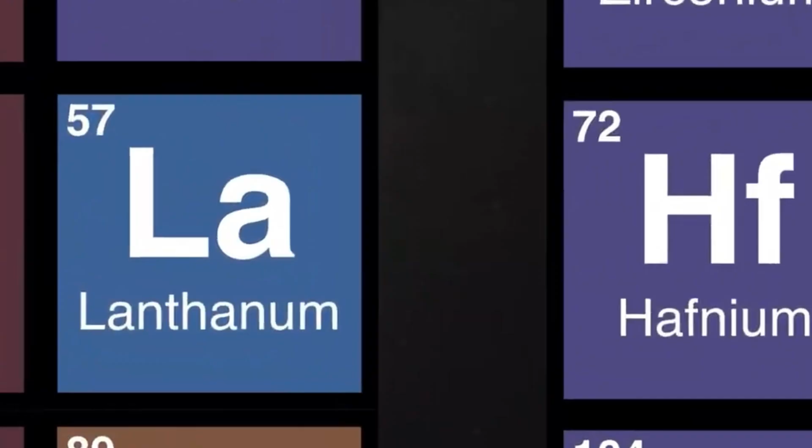What are rare earth elements? Rare earth elements, commonly abbreviated as REEs, comprise 17 metallic elements. 15 belong to the lanthanide series on the periodic table. Two additional elements, scandium and yttrium, are grouped with them because they share similar chemical behaviors and are typically found in the same mineral deposits.

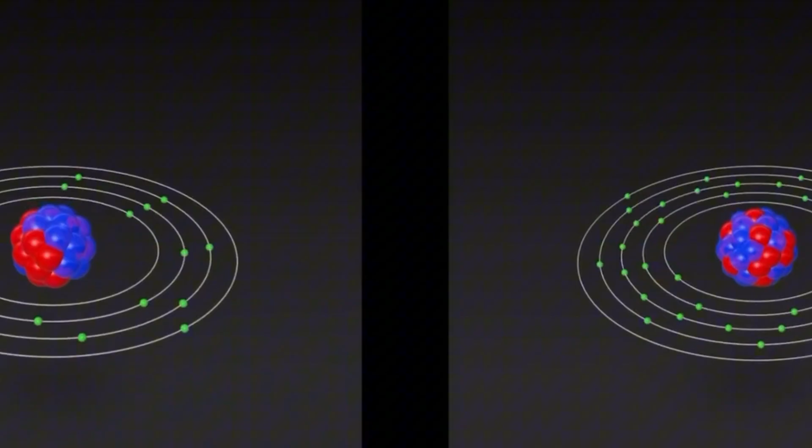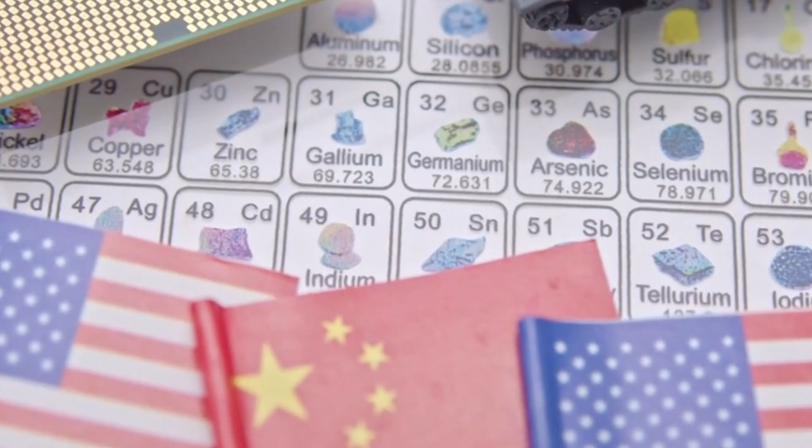The name is, in a sense, misleading. Cerium, one of the most widely used REEs in industry, is more abundant in the Earth's crust than copper. Even thulium, the least common of the group, is more plentiful than gold. They are called rare not because of scarcity, but because of distribution. These elements are almost never found in economically viable concentrations. They are dispersed in minute quantities across broad geological formations, making extraction and refinement technically demanding and commercially expensive.

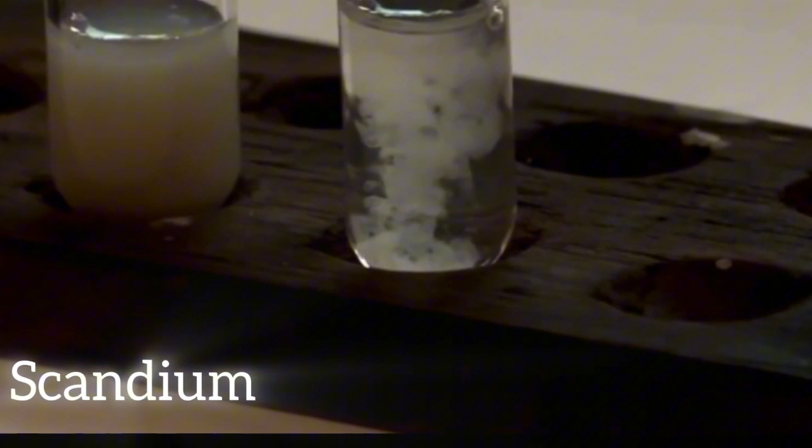An analogy: imagine dissolving a teaspoon of salt into an Olympic swimming pool. The salt is present. Recovering it in pure form is another matter entirely.

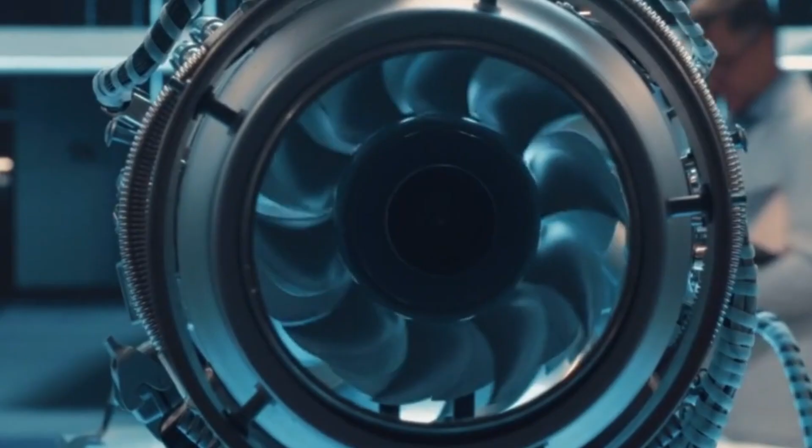What makes REEs industrially irreplaceable is their combination of magnetic, thermal, optical, and catalytic properties that no substitutes can fully replicate. In materials science, they are sometimes called the vitamins of industry, needed in small quantities, yet essential to function. In aviation specifically, their role is pervasive, from the turbine at the core of the engine to the electrical systems running throughout the airframe.

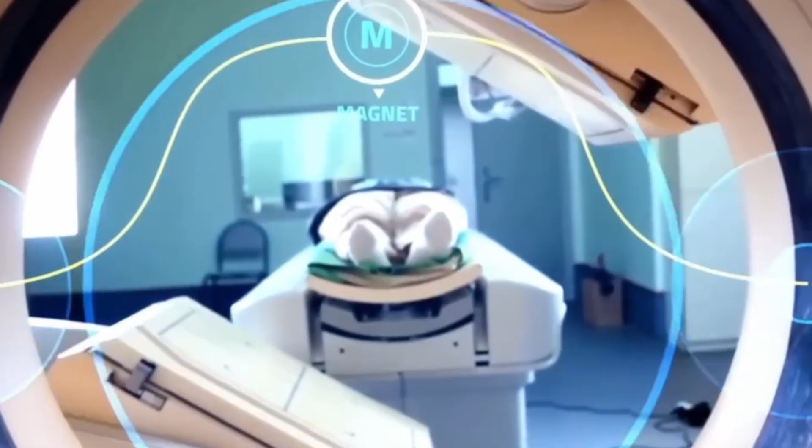The jet engine, operating beyond its own limits. To appreciate why rare earths are so critical, one must first understand the operating environment of a modern turbofan engine. Engines such as those powering the Boeing 787 Dreamliner or the Airbus A350 operate on a straightforward thermodynamic principle: draw in air, compress it, combust it with fuel, and extract energy from the resulting gas flow as it expands through a series of turbine stages.

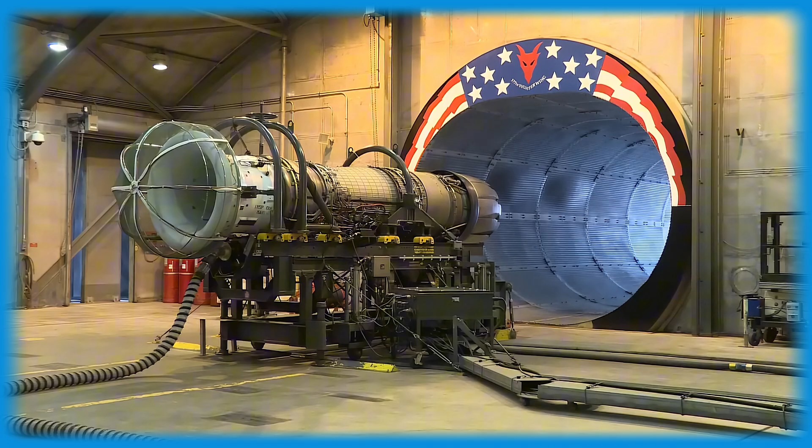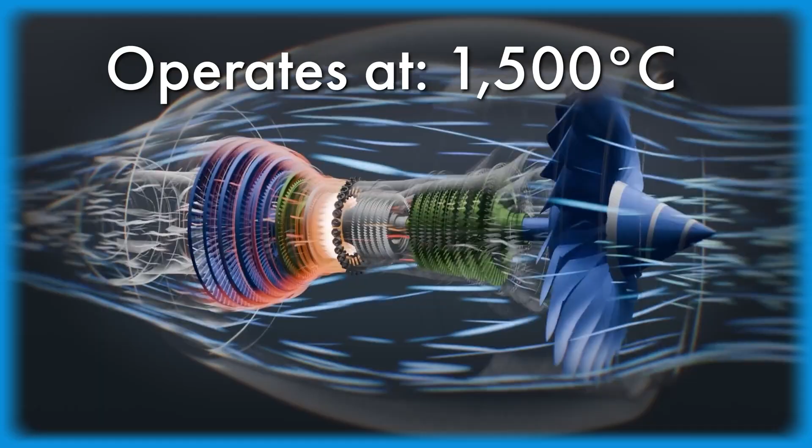The turbine blades at the heart of this process sit directly in the path of combustion gases reaching between 1,500 and 1,700 degrees Celsius. Here is the problem: the nickel-based superalloys from which those blades are forged have a melting point of approximately 1,300 degrees Celsius. The engine, in other words, runs hotter than the melting point of its own components. This is not a design flaw. It is an engineering challenge that rare earth elements and the materials they enable have been specifically developed to solve.

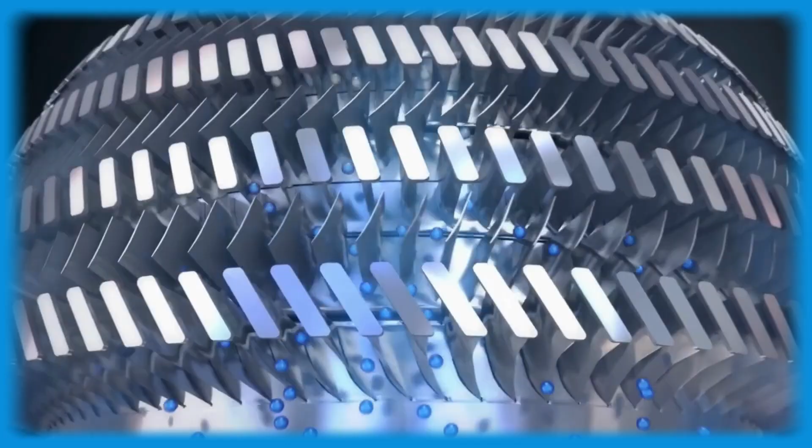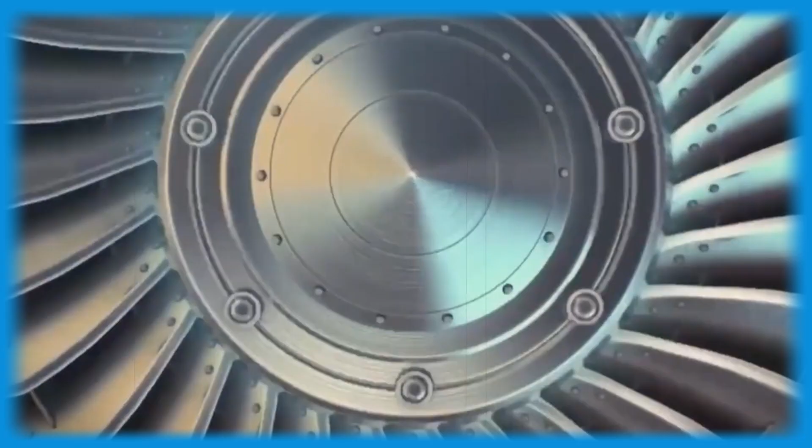Yttrium, the thermal barrier. Yttrium, element 39, is arguably the most consequential rare earth element in jet aviation. Turbine blades in modern engines are coated with a ceramic layer called a thermal barrier coating, or TBC. The most widely used formulation is yttria-stabilized zirconia, YSZ, a compound in which yttrium oxide is added to zirconium oxide. Zirconia on its own is an excellent thermal insulator but is structurally unstable at elevated temperatures. It undergoes phase transformations, expands unevenly, and fractures under thermal cycling.

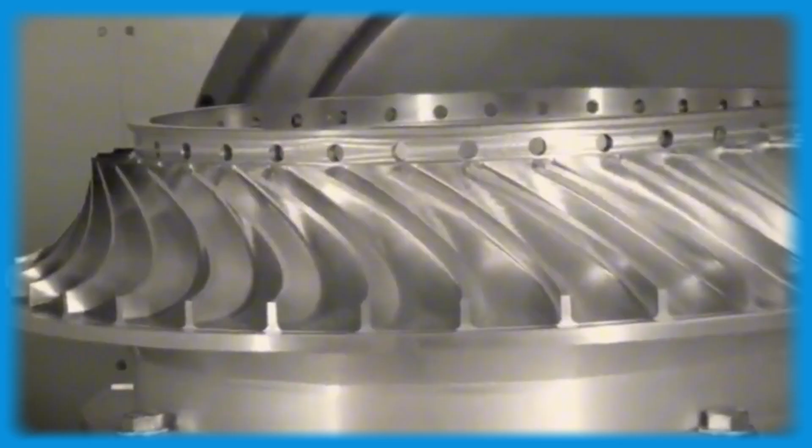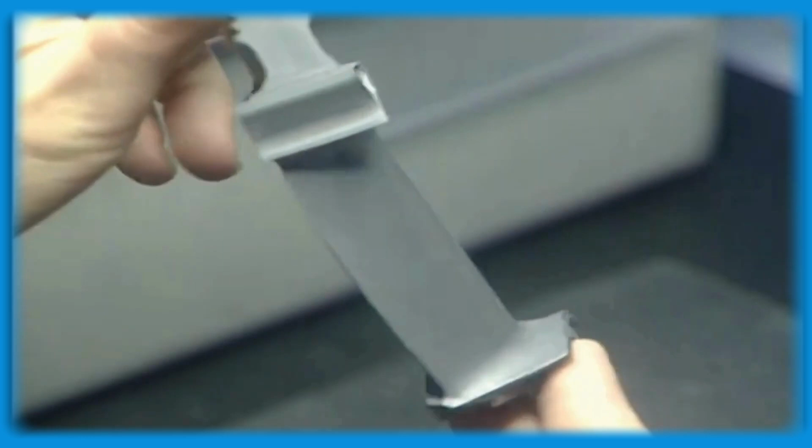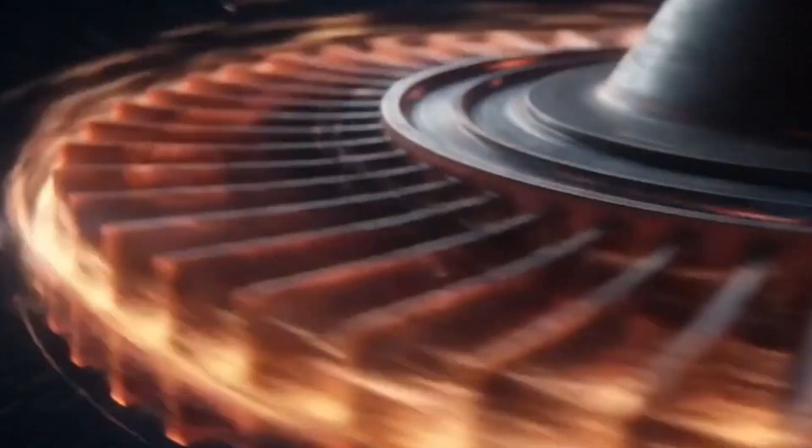Yttrium arrests this instability by locking the zirconia into a tetragonal crystal phase, preventing the destructive phase changes that would otherwise occur. The result is a ceramic coating typically between 100 and 300 micrometers thick that insulates the underlying metal blade, reducing its surface temperature by as much as 150 to 200 degrees Celsius relative to the gas stream. This margin is what makes modern high-efficiency engines thermodynamically possible.

An advancement worth noting: recent research has focused on next-generation TBC formulations using rare earth zirconate and hafnate compounds, materials capable of operating beyond the practical temperature ceiling of conventional YSZ. These emerging coatings promise a further improvement in thermal efficiency, directly translating to reduced fuel consumption and lower emissions across the global fleet.

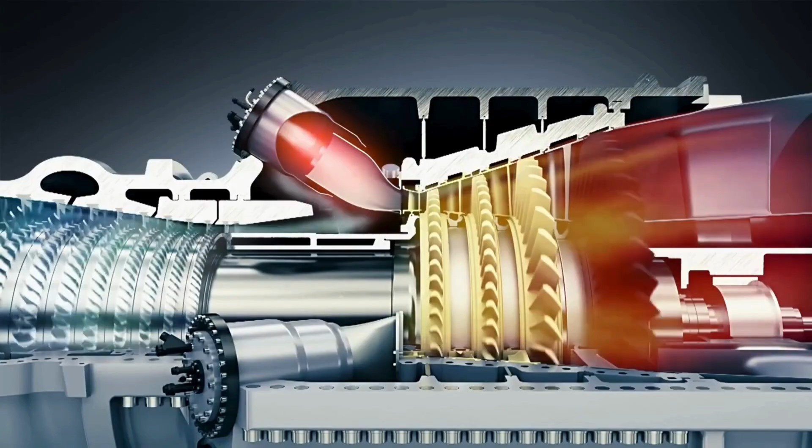Without yttrium-based thermal barrier coatings, engine operating temperatures would be substantially lower, fuel efficiency would decline, and routes such as Singapore to New York, currently among the longest non-stop commercial flights in the world, would require an intermediate stop. Neodymium and dysprosium, the magnet revolution.

Aviation's ongoing shift toward what engineers call the more electric aircraft architecture, replacing hydraulic and pneumatic systems with electrical equivalents, has made permanent magnets a central component of modern airframes.

The dominant technology is the neodymium iron boron magnet, developed in 1982. NdFeB magnets are the most powerful class of permanent magnet yet produced, generating magnetic fields far stronger than their predecessors, at a fraction of the size and weight.

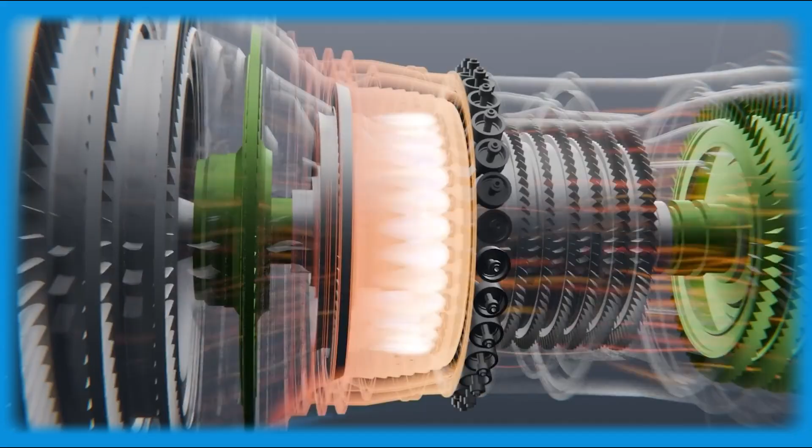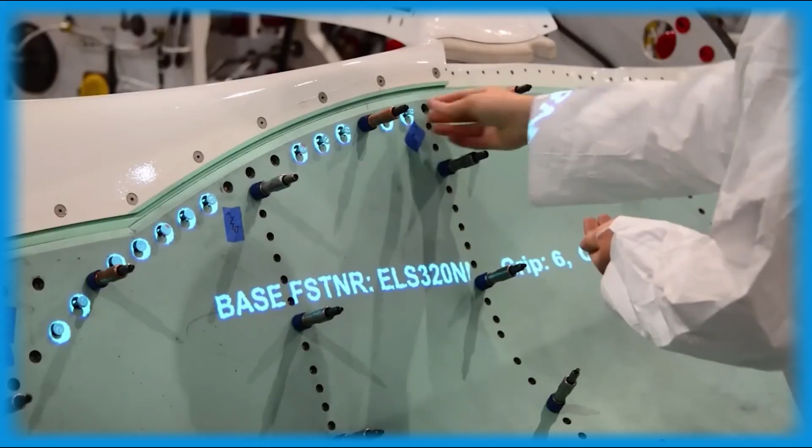In a modern commercial aircraft, these magnets are found in electric actuators controlling flight surfaces, onboard electrical generators, fuel and hydraulic pumps, environmental control systems, avionics, cooling, and landing gear mechanisms.

The Boeing 787 generates 1.45 megawatts of onboard electrical power, the highest of any commercial aircraft at its time of introduction. That generating capacity is underpinned by neodymium magnet technology.

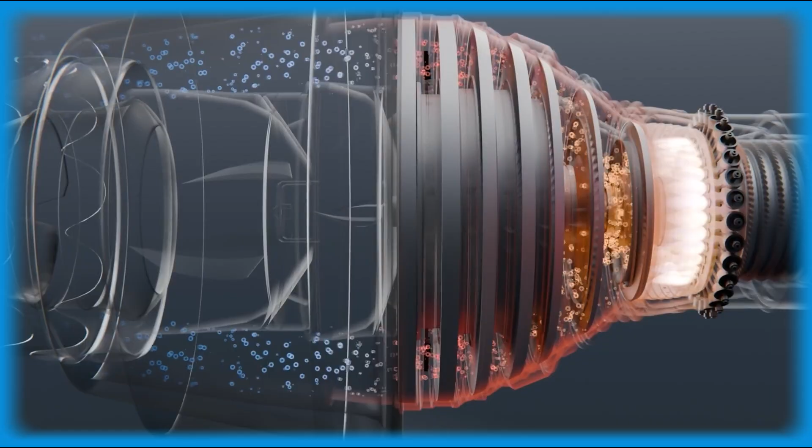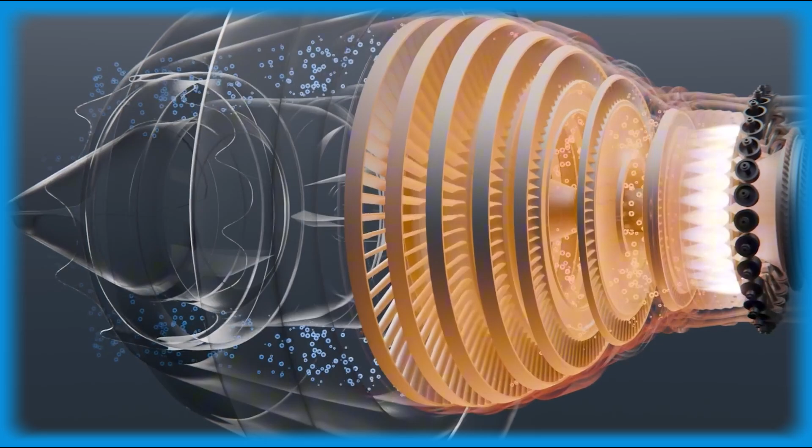However, neodymium magnets have a significant operational vulnerability: they lose magnetic strength as temperature rises. This phenomenon, known as coercivity reduction, is a serious concern in aircraft, where temperatures can range from -60 degrees Celsius at altitude to well above 150 degrees Celsius near engine nacelles and avionics bays.

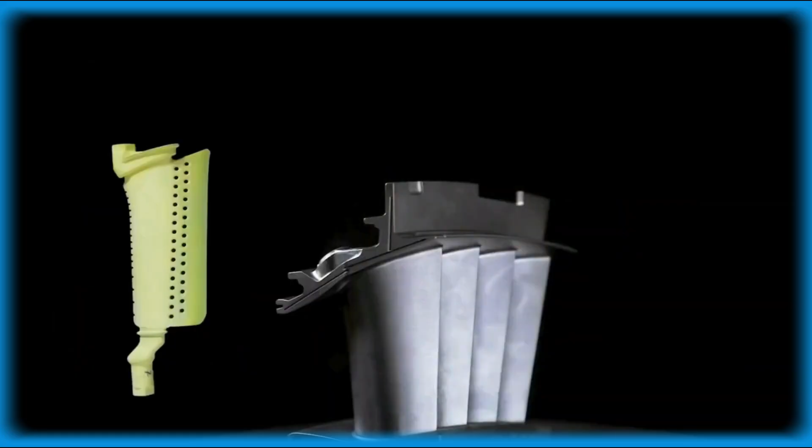Dysprosium, element 66, addresses this directly. When added to neodymium magnets in concentrations of 2 to 6%, dysprosium significantly raises the coercivity of the magnet, maintaining field strength across the wide temperature range experienced in service.

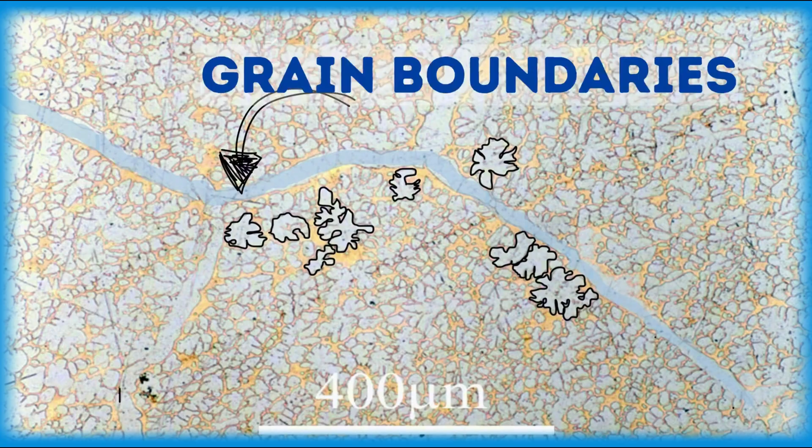A critical supply dimension: dysprosium is among the scarcest of the commercially significant rare earth elements, produced almost exclusively as a byproduct of other mining operations. Its supply is structurally constrained, and demand is growing as electrification of aviation and transportation broadly accelerates.

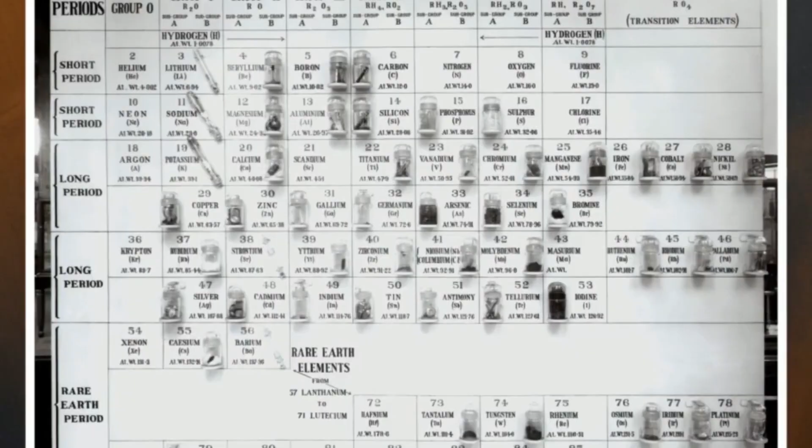This has focused considerable research effort on dysprosium-lean and dysprosium-free magnet formulations, though no commercial alternative has yet matched the performance of the established alloy at operating temperatures.

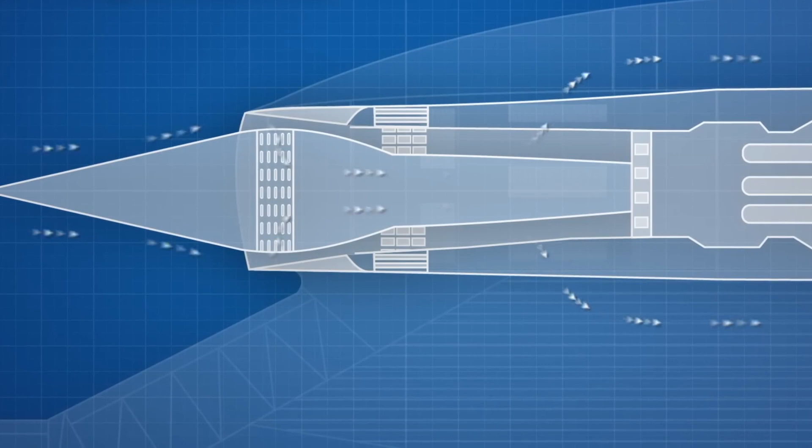Lanthanum and cerium, strengthening the alloys. Beyond coatings and magnets, rare earth elements are incorporated directly into the metallic alloys that form the structural foundation of jet engines and airframes. Lanthanum, the first element of the lanthanide series, is added to nickel-based superalloys in trace concentrations during manufacture. Its effect operates at the microstructural level.

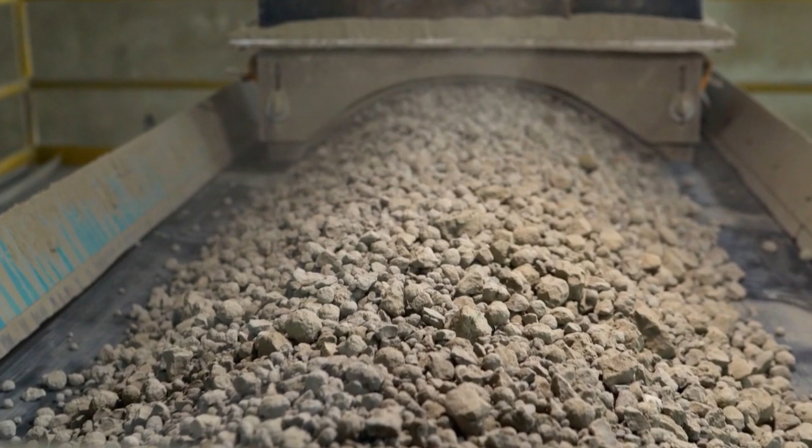Lanthanum refines the grain size of the metal as it solidifies, producing a finer, more uniform internal architecture. Finer grain structures improve tensile strength, fatigue resistance, and crack propagation behavior, all of which translate directly to extended component service life and longer maintenance intervals.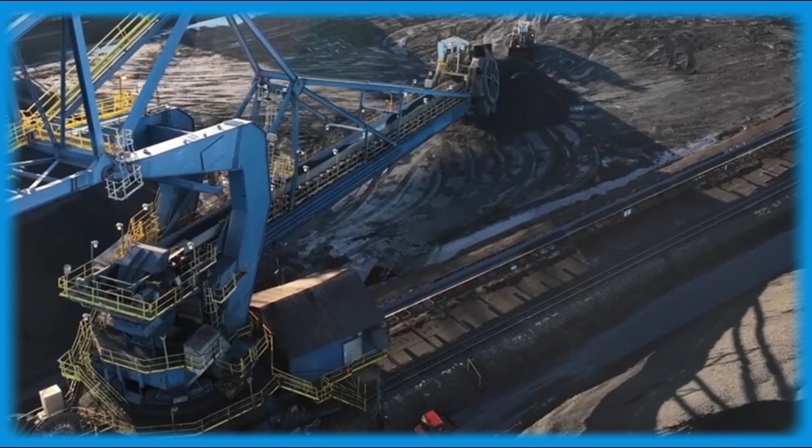Cerium serves a complementary function in aluminium alloys, which are used extensively throughout airframe structures. At elevated temperatures, conventional aluminium alloys are susceptible to microstructural coarsening, a process by which the internal phases of the metal consolidate and degrade mechanical properties.

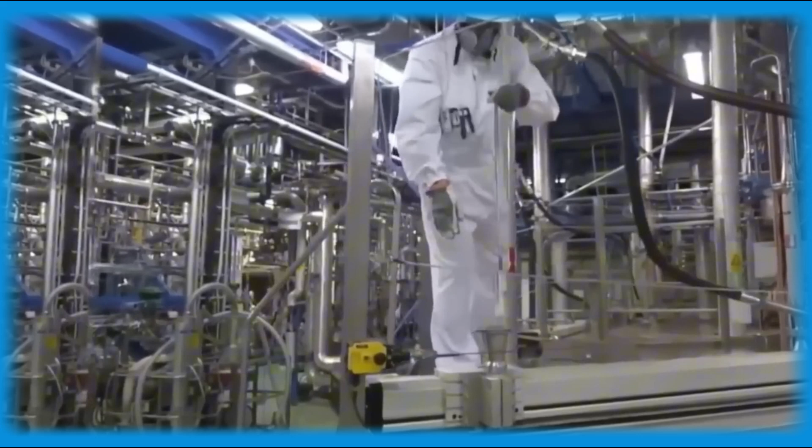Cerium additions form thermally stable intermetallic phases that resist this coarsening, preserving strength and oxidation resistance through repeated thermal cycles.

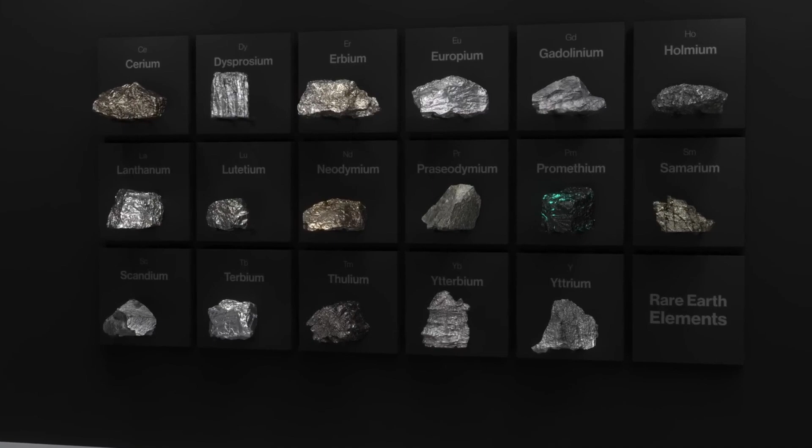An emerging application: researchers at several national laboratories and aerospace manufacturers have recently demonstrated cerium-modified aluminium alloys capable of retaining their mechanical properties at temperatures significantly above the operational limit of standard aerospace aluminium. If this technology matures to production readiness, it could enable structural weight reductions across large airframe sections, with meaningful implications for fuel efficiency and emissions.

In an industry where a single kilogram of excess weight costs an airline thousands of dollars in fuel annually across its fleet, the compounded value of rare earth enhanced materials is measured in the billions.

The broader ecosystem in aviation: several additional rare earth elements contribute to aviation in more specialized roles.

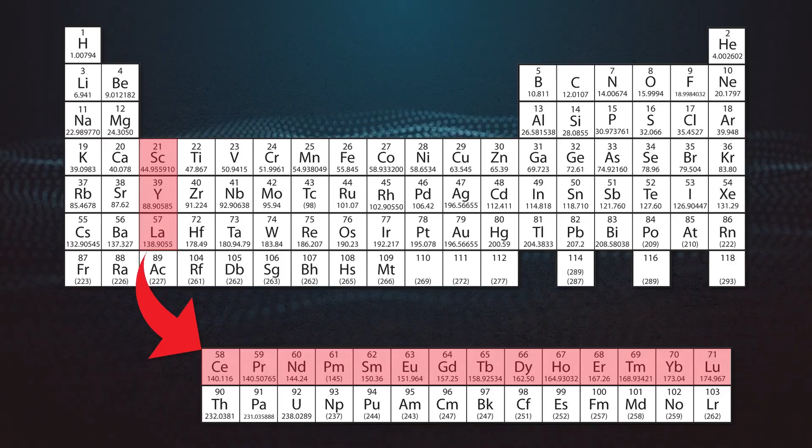Praseodymium, element 59, is combined with neodymium in magnet formulations to balance cost and performance. It also imparts specific optical properties to glass coatings used in cockpit windows, where spectral filtering and glare reduction are operationally significant.

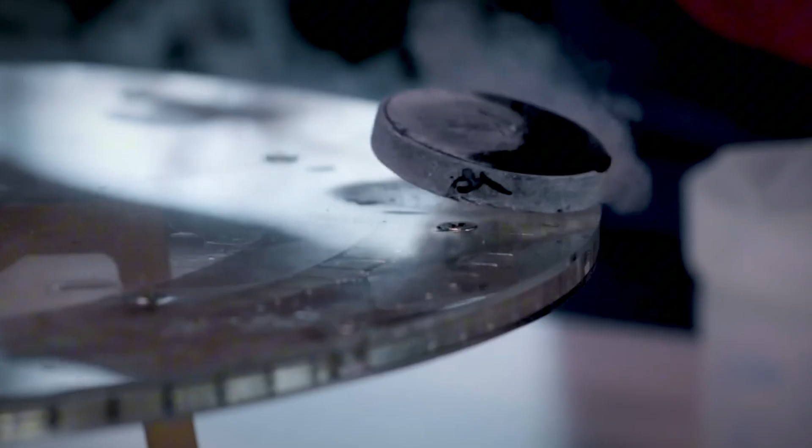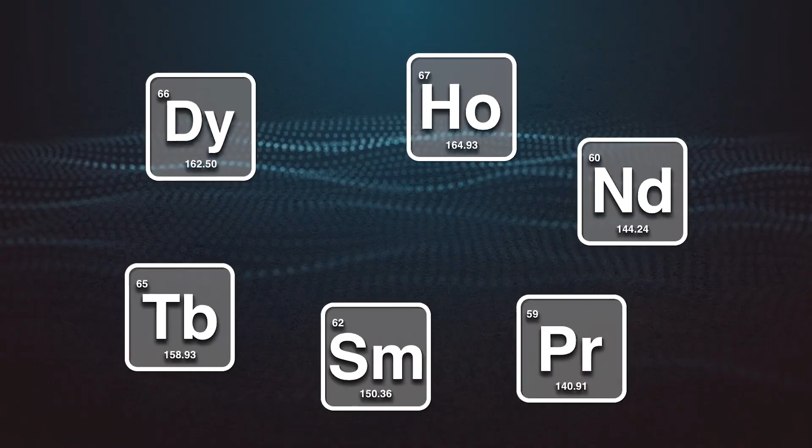Samarium, element 62, forms samarium cobalt magnets, the predecessor technology to NdFeB. While delivering lower magnetic energy density overall, samarium cobalt magnets exhibit superior thermal stability, making them the preferred choice for sensors and actuators mounted in close proximity to engine hot sections where temperatures exceed the operating range of neodymium-based designs.

Terbium, element 65, is used in magnetostrictive materials, substances that undergo controlled dimensional changes in response to a magnetic field. In precision actuators and vibration damping systems, this property enables active structural control, reducing fatigue loading on critical components.

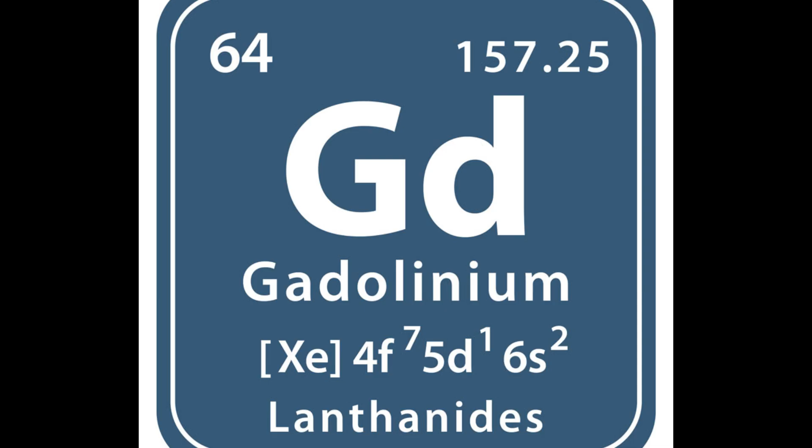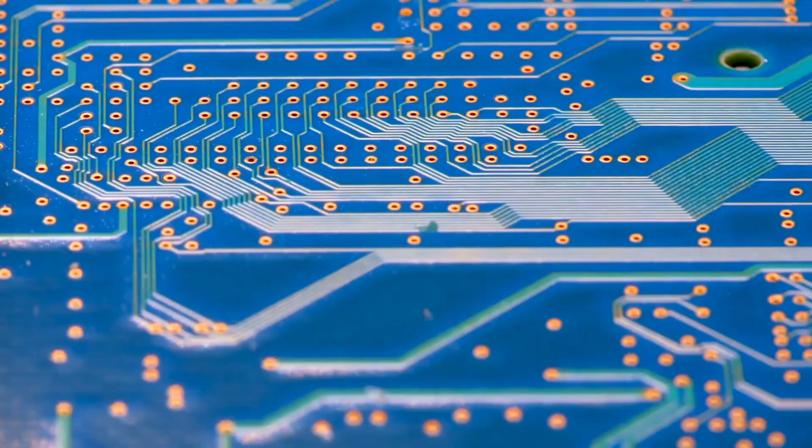Gadolinium, element 64, with its exceptional neutron absorption cross-section, is under active investigation for use in radiation shielding composites relevant to high-altitude flight, where galactic cosmic radiation exposure is a recognized occupational health consideration for flight crew.

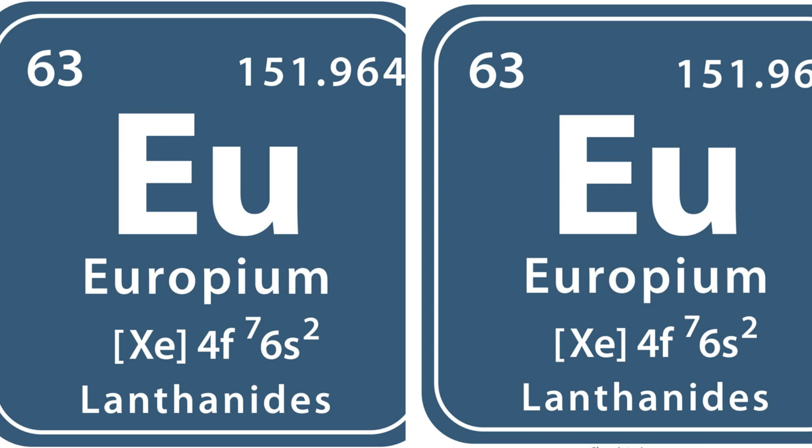Europium and ytterbium contribute to the phosphorescent and display coatings used in instrument panels and cabin systems, where their precise luminescent properties underpin readability and reliability across a wide range of ambient light conditions.

The geopolitical dimension.

The dependency of global aviation on rare earth elements raises a strategic question that extends well beyond procurement management. According to the International Energy Agency, China accounts for approximately 60% of global rare earth mining output and controls more than 85% of global processing and refined magnet manufacturing capacity. The concentration of this capacity in a single nation represents a structural vulnerability across the entire aerospace sector, civil and military alike.

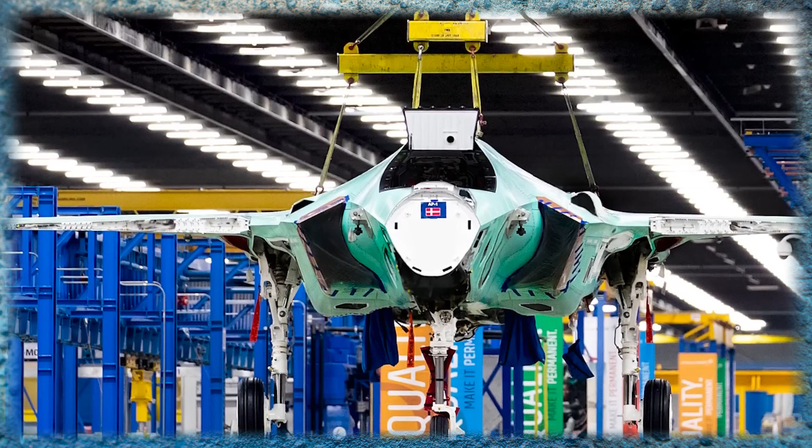The consequences of this dependency have moved from theoretical to operational. In September 2022, the United States Department of Defense was compelled to suspend deliveries of the F-35 Lightning II fighter aircraft after the discovery that an alloy used in a component of its engine contained a combination of cobalt and samarium originating from Chinese-controlled supply chains, in violation of domestic defense procurement regulations. Each F-35 airframe contains approximately 417 kilograms of rare earth materials distributed across its propulsion, avionics, targeting, and electronic warfare systems. The incident was not an anomaly.

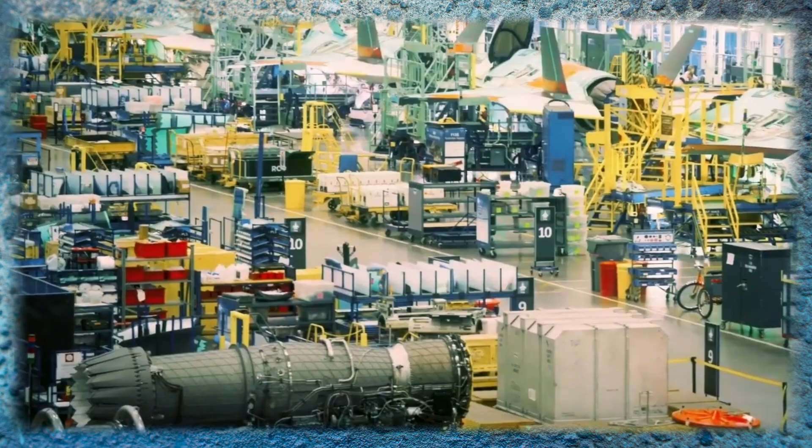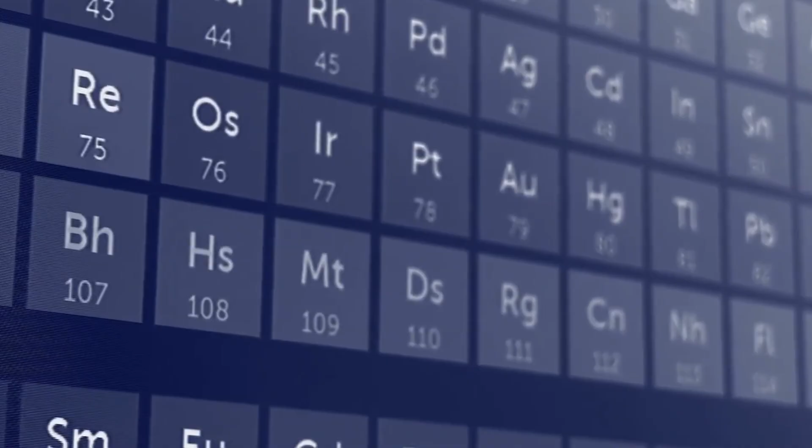It was a signal. Commercial aerospace faces the same exposure. Every major engine manufacturer, GE Aviation, Rolls-Royce, Safran, and Pratt & Whitney, sources rare earth inputs through supply chains that route, at some stage, through Chinese processing facilities. In a scenario of significant export restriction, production timelines and maintenance supply chains for commercial aircraft would be materially disrupted.

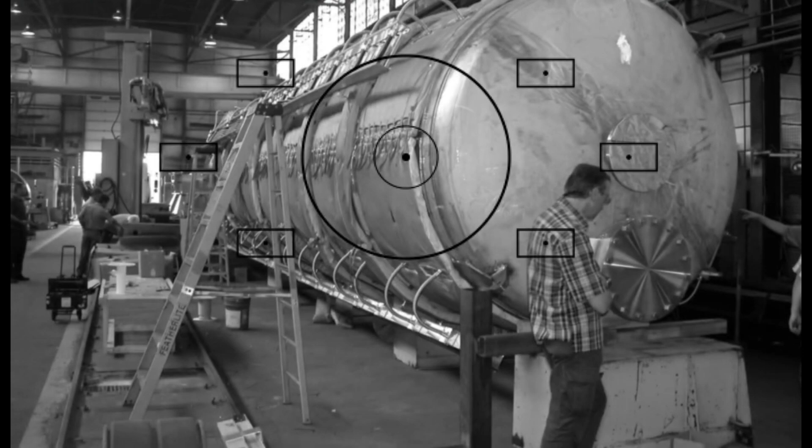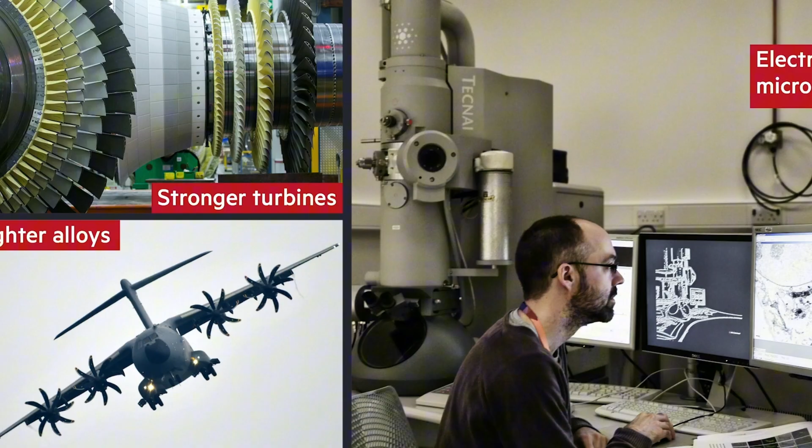China has demonstrated its willingness to use rare earth access as a lever in trade disputes. In 2010, it imposed export restrictions that sent global rare earth prices to multiples of their prior levels. Whether a more comprehensive restriction would be deployed in a future geopolitical context is an open question, but the structural dependency makes the answer consequential.

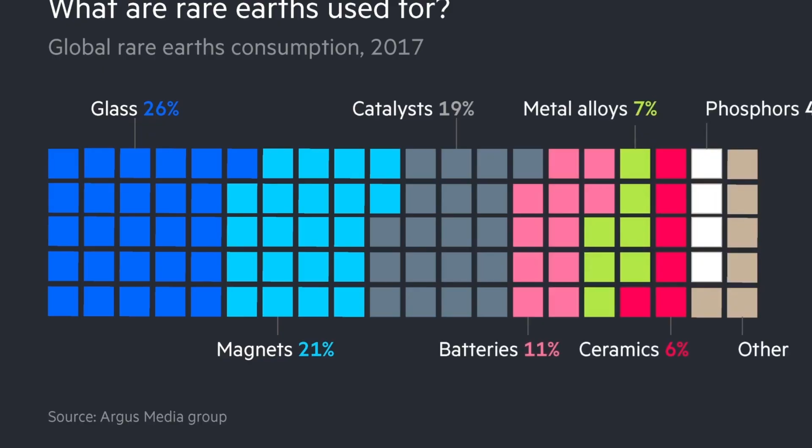Strategic responses and the path forward. The aerospace industry and the governments that underwrite it have not been passive in the face of this risk. Supply diversification has become a policy priority across multiple jurisdictions.

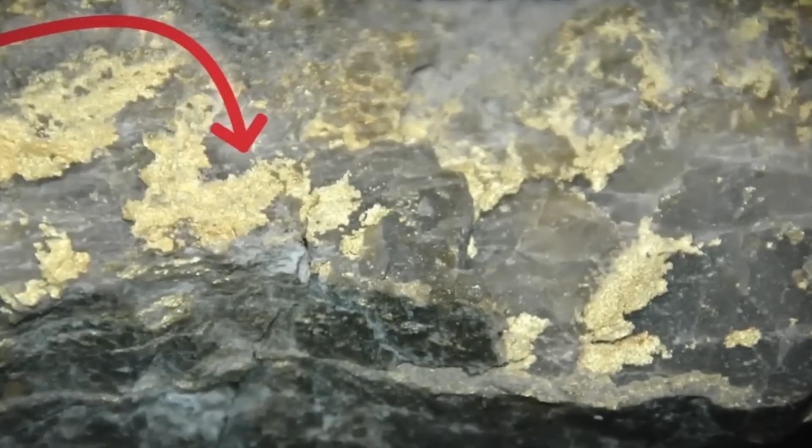The Mountain Pass mine in California, the only significant rare earth mining operation in the United States, has been recommissioned and is scaling production. Australia's Lynas Rare Earths operates the only major rare earth separation facility outside China, with capacity expansions underway. Canada, India, and several European nations are investing in domestic extraction and refining infrastructure. Material innovation is running in parallel.

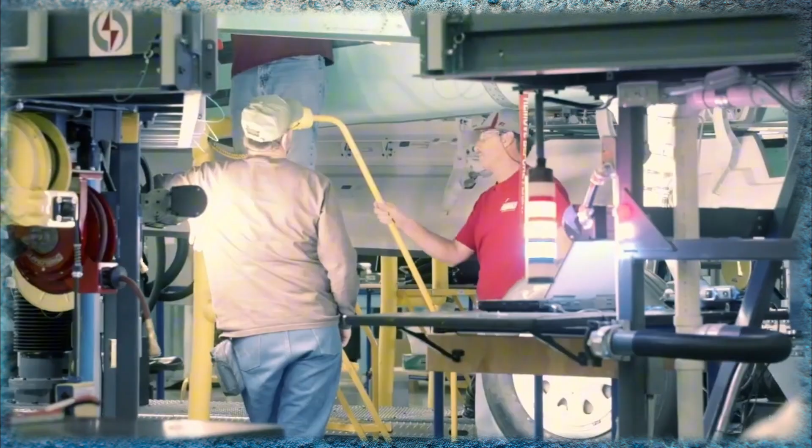Engineers at GE Aerospace, Rolls-Royce, and academic institutions are developing thermal barrier coating chemistries based on rare earth zirconate and hafnate compounds, materials that can operate at temperatures exceeding the practical ceiling of current yttria-stabilized zirconia, while potentially using smaller quantities of scarce heavy rare earth elements.

Magnet research is pursuing two parallel tracks. One focuses on further optimizing NdFeB formulations to reduce dysprosium content without sacrificing high-temperature performance. The other investigates fundamentally different motor architectures, switched reluctance and wound field synchronous designs, that eliminate the dependency on rare earth permanent magnets entirely. NASA, Airbus, and a number of well-funded startups are active in this space, though none has yet demonstrated the power-to-weight performance required for primary propulsion applications.

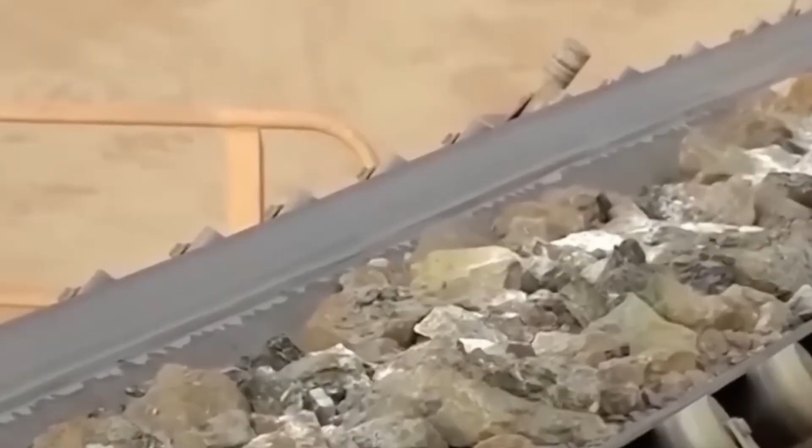Recycling and circular economy approaches represent a longer-term lever. Rare earth elements can, in principle, be recovered from end-of-life magnets, coatings, and alloy components. At present, recovery rates are low due to the technical complexity of separation and the economics of primary mining. As primary supply tightens and material values increase, the case for closed-loop recovery in the aerospace sector is strengthening.

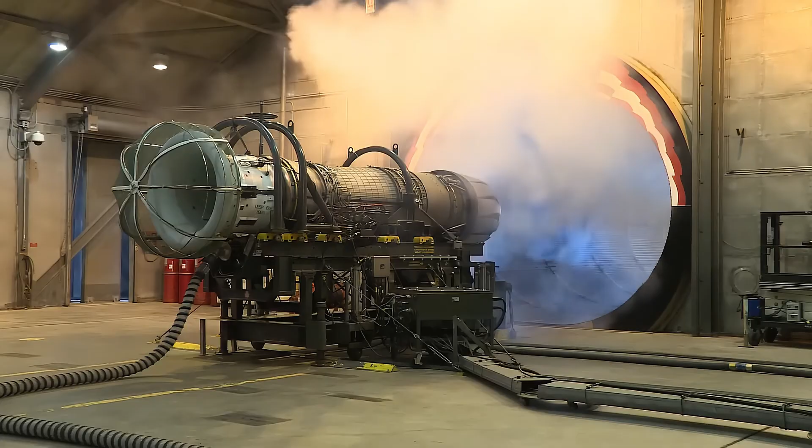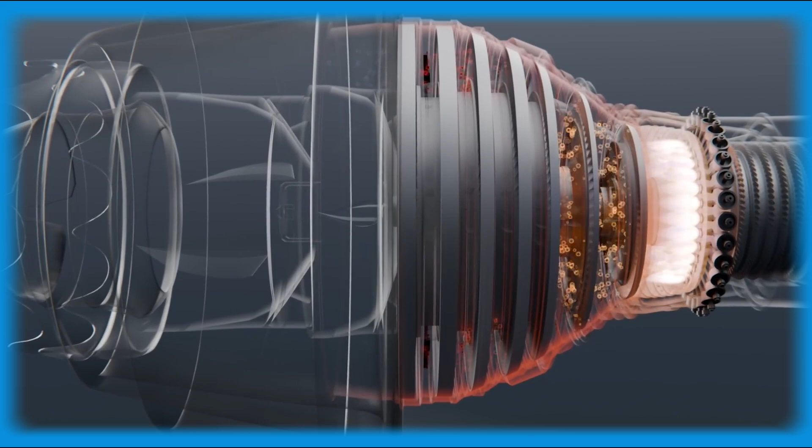The next time you observe a contrail tracing its arc across the sky, consider what sustains that line. Inside each engine, temperatures exceed the melting point of the metal from which the components are made. Forces that would fragment ordinary alloys are contained by materials engineered at the atomic level. Ceramic coatings a fraction of a millimeter thick, magnets smaller than your fist, trace additions to alloys measured in parts per million. Yttrium, holding the thermal barrier in place on a turbine blade spinning at thousands of revolutions per minute.

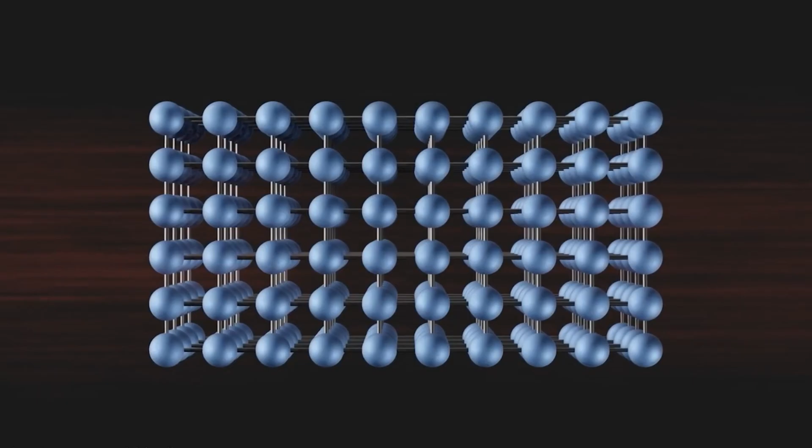Neodymium, generating the magnetic fields that power every electrical system aboard. Dysprosium, preserving that magnetism as temperatures swing by hundreds of degrees through each flight cycle. Lanthanum and cerium, silently strengthening the grain boundaries in metal that must last for tens of thousands of flight hours.

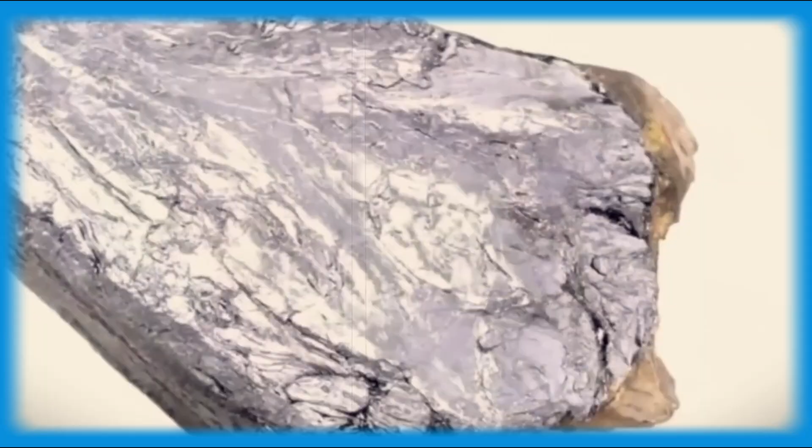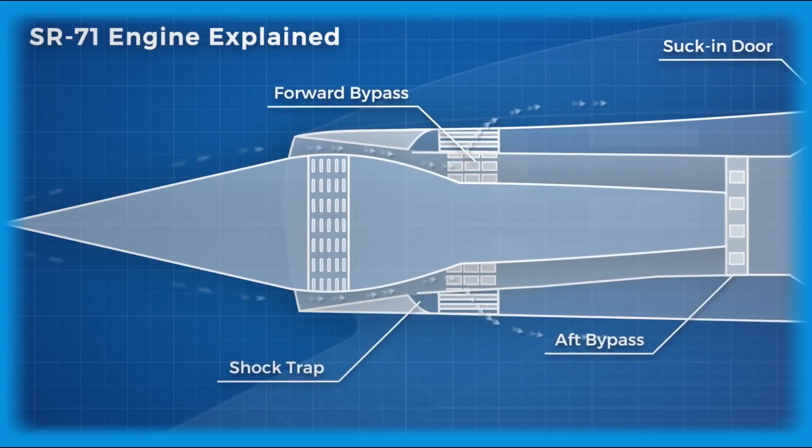These are not exotic or peripheral materials. They are the foundational layer on which modern aviation rests, mined from the earth, refined through complex chemistry, and engineered into components so precise they must be measured with instruments that did not exist a generation ago. The supply chains are fragile. The geopolitics are shifting. The research community is working with genuine urgency. And above it all, every day, 100,000 flights take off.